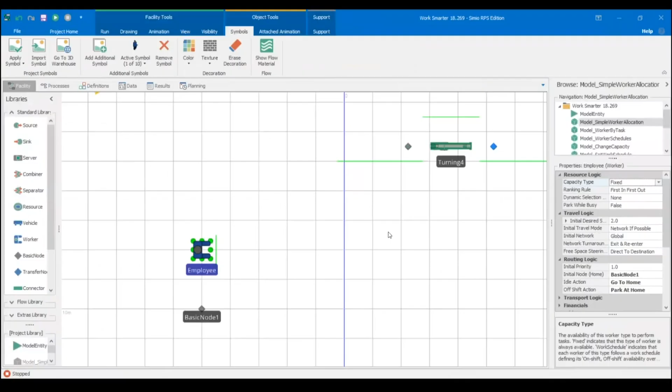We can also modify a few other properties to mimic realistic behavior, such as speed, what kind of paths it can move, and how it selects its specific task allocation. Since every single time an entity requires a worker to do something, those get added into a queue, a list of tasks the worker needs to perform. We can play around with some of the properties to sort them and figure out how the worker wants to move around and complete all of these.

But now that we have our little worker implemented in the system, we want to understand, okay, how can a worker be added to a specific machine, or the worker requirement?

If we click any of our servers or machines, you'll note that in the properties there is one specific section called secondary resources. This allows us to specify, for a given machine or station, what external resource—whether a worker object or a resource object, another object available in our library—is necessary to complete the specific tasks.

If we wanted to specify that we need an employee or worker of a certain category to come and complete the tasks, we can specify that we need a specific worker instead of a multitude of workers. In this case, all of these properties were already pre-filled as I was playing around with them before, but you would normally see a completely blank slate, ready to be filled with your options.

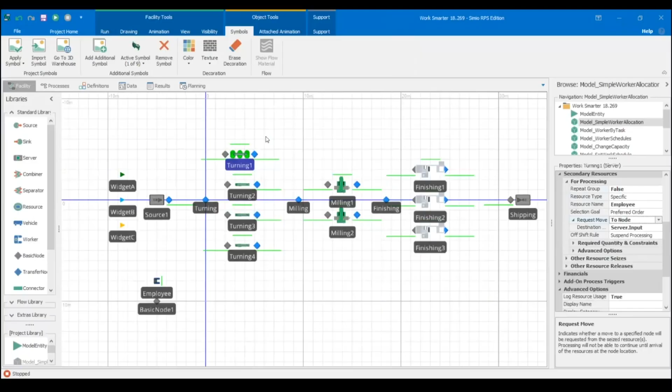In our case, this could be the node of the actual machine, so if we wanted to do something specifically here, or it could be an external node somewhere else where a task needs to be performed. For example, if there's a specific operation needed on this complex board with cables and wires, but it requires going 3 doors down to a different room with a different set of machines to fix something or complete a task there, we can specify that move right here.

In our case, I want the worker to go to the specific table, the specific machine it's working at. The generic syntax would be server.input. Because our objects are intelligent, whenever we use the generic server syntax, the machine—in this case, Turning 1—knows that the generic sentence refers to itself. So it's fully aware that I want the worker to move to the input node of the server itself, in this case Turning 1.

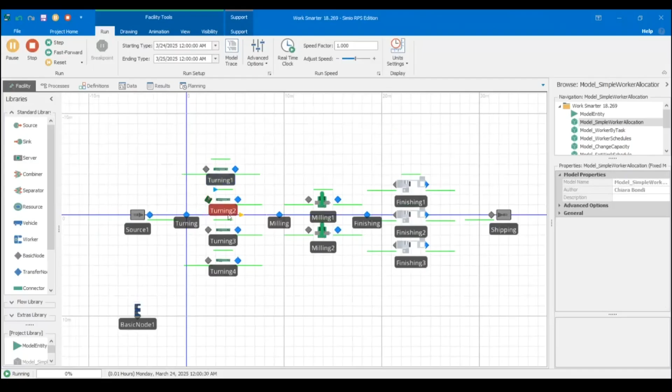Now, if we click run and watch all of our orders going, we'll see our workers start to move to wherever we've added those worker requirements. As you'll note, in some machines we've added worker requirements and in others we have not. This could depend on the type of machinery, the specifications of the task at hand, the location, etc.—for example, experimenting with old machinery that requires labor or hands-on work versus new machinery that is automated.

So this is a case where you might have different setups to figure out how to add labor to model your current system, and then how to remove that labor requirement to experiment with a new potential future setup. In this system right now, we have our workers going to complete every single task. In fact, the tasks we're performing are referencing a specific table, so we might be completing 1, 2, 3, 4, 5, 6 different operations at each given machine.

If you want to know how we added this task sequence table and how we add all those different operations, I recommend going to our building blocks part 2, because we dive much deeper into that right there.

But one of our questions might be, well, I don't actually need the worker to complete everything, because right now our worker is going to be going to each machine and complete all given tasks. So if a worker is required to complete at the turning machine tasks 1 and 2, it's going to go and be there for the entire time.

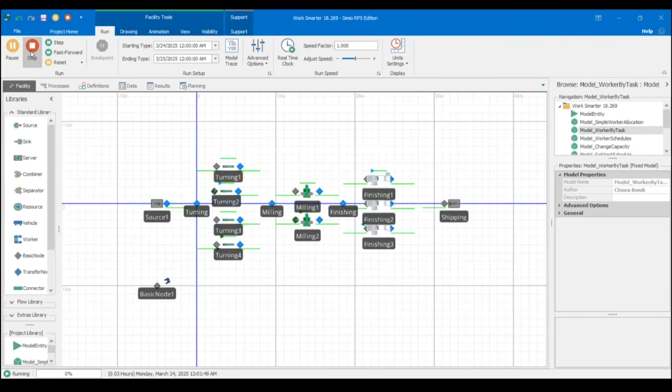So the question might be, how is that possible if we said there's no secondary resource requirement? The reason for that is because I have specified through the table what specific tasks need a worker. So it's no longer as soon as an entity arrives at a machine that the worker needs to go. The worker is going to be required only for certain operations.

And the way we can define that is if I open our repeat group property, you'll see there's a secondary resources requirement within the task repeat group. So just like we can specify one for the server itself, we can add resource requirements for the individual tasks at hand. And just like I'm referencing our table to identify the name, the branch type, the processing time, etc., I can also reference that to specify the resource type, whether it's specific or from a selection list, and then the name of that resource.

So I can now store all of that information directly inside of a table, no longer locally stored in the server. This makes it much easier for larger systems where we might have a lot of workers, a lot of machinery, each one with its own very unique worker requirements. It allows more flexibility to modify those properties, because we no longer need to go inside of each individual server, we can just access a table.

And we could even reference the location where we want that worker to move, or other requirements such as constraints and specific selection conditions. How do I ensure that the worker I pick is one that has a certain level of qualifications? We can add all of those specific needs right here and have those potentially reference a given table.

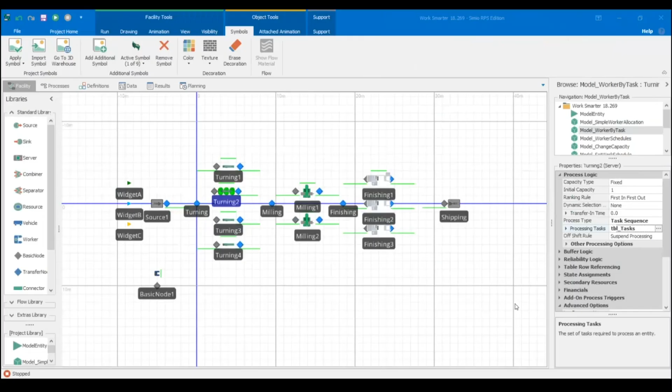So if I go into my data, you'll see the table is exactly the same as the one we saw before, just with a few extra columns. One is an enumeration property. I get confused a lot of the time trying to remember what type of column or property is needed to add the different selection options, whether it's specific, select from list, parent object, or even other enumeration types.

For example, the enumeration for material action type, whether we are trying to do a material table where we consume or produce, etc. When we want to have all those multiple options, the enumeration property is where you want to look. And then the other column that we want is our object.

In this case, I put it under transporter, but we can also just use whatever object or transporter we want to reference. We just need a table or a column so that we can specify, okay, I need an employee. Now, one key thing I want to note is when you first create a property or an object reference property, such as this one right here, you'll note that you'll get all these errors.

And all of these are because there's no object reference in the row just yet. This is because in the properties of the column, we have that each single row must have a non-null value. So every single row must reference something.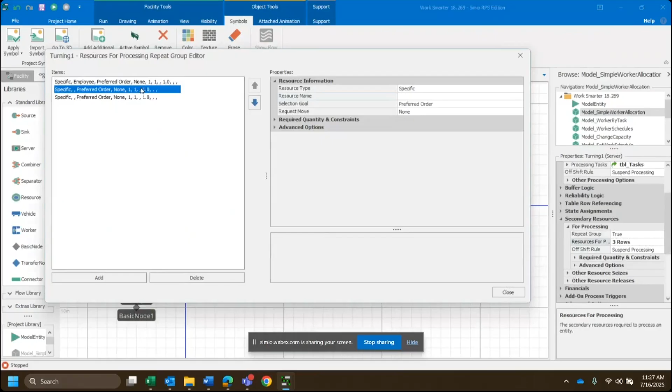So for example, say you want to model the resource of a worker and the resource of an object that they need to use, a tool, such as a drill, and you only have a certain number of tools. You can't really have the worker go and complete that operation without a drill. So those are scenarios where you might model the drill as a resource, the employee as the worker, and then specify that you actually need to have both a worker or employee as well as a resource.

In this case, this could be your drill, move to the specific node, so server input. And in those cases, whenever something goes in here, we're going to need both of these to be seized. And so now, if I click one and we just wait for one to hit, let's see if I can. Here we go. So something's gone here.

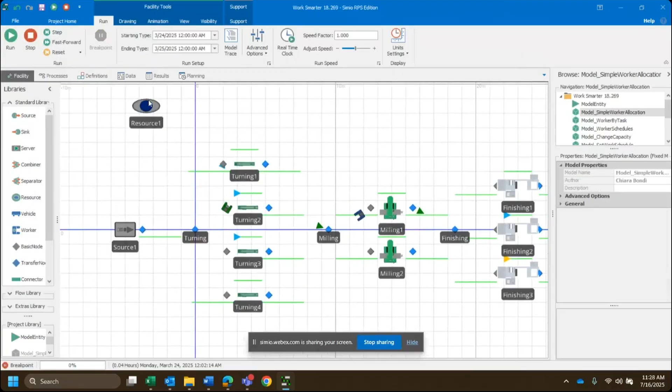And now what we should see is we'll see one worker move to the server, but we'll see the resource here also turn green. And this is because now we have seized both the worker and the resource. And now that this is finished, the resource and the worker have both been released.

All right, one more here, then I'll let you get back. How can we add a schedule that may not follow a specific pattern, but changes day by day with different breaks and times? Perfect. That's actually going to be a great transition into how do we even add work schedules in the first place.

So with that, let's jump into the next model, which is where we're going to start looking at how can I add schedules.

So right at the beginning of the presentation, when we looked at the properties of the workers very quickly, the first one that I wanted to notice was the capacity type, where it can either be a fixed capacity, always 1 or always 0, i.e. always on shift or always off shift, or we can specify a work schedule.

And you'll notice here, if I expand on these, we can start to add, okay, what is the work schedule that they need to follow? And then what are certain exceptions, like a work day where they're not actually on shift, such as a holiday, or work periods where maybe during the given day they might have to work from 9 to 12, but there's a small break in there that we need to add an exception for, and they're going to be off shift. How do we start doing that?

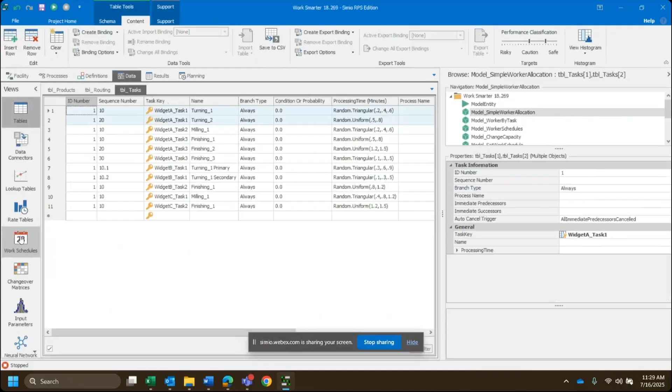Well, if we go into our data, you'll notice on the left-hand side all these different tabs, and a little bit further down there's actually work schedules. And this is where we can add both a pattern base, one that repeats every week in exactly the same manner. So what comes to mind is the standard 8 to 5 or 9 to 5 schedule where you clock in, you have a lunch break, you clock out at the end of the day.

Or if we wanted to add more flexibility, we could do so using a table. And with a table, we can have specific dates or add that information in each table where we specify for every day the specific time ranges where workers are on shift or off shift.

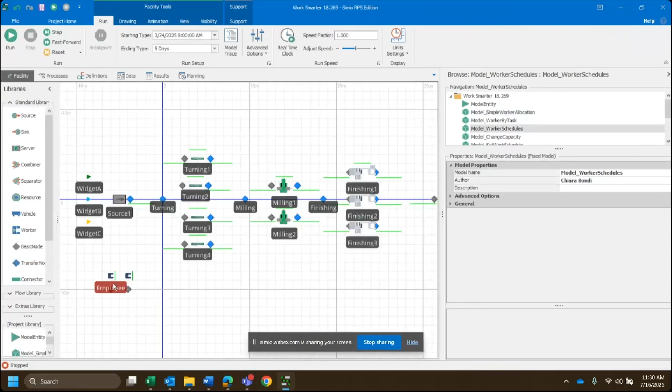But let's look at the example model that we have prepared. In our case, we're going to be looking at what happens when we have, for example, 2 different employees. One, that we want a standard schedule to be followed, a typical sort of day of work. But then we might have certain days during the week where we know we need extra help. We know that we need more hands in the system.

So let's go into that data tab and look at what that schedule looks like. You'll notice that I've created 3 different schedules. And as we go on, you'll see why.

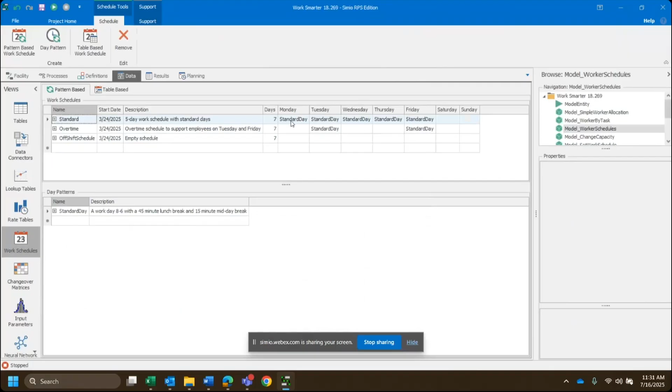The first one I want you to notice is the standard, where Monday through Friday we follow the typical standard day, which is a pattern that gets repeated. You start and finish always the same. The way we define that pattern is by adding a day pattern.

The pattern work schedule is one that gets repeated the same way every single week. Whereas if we wanted a more flexible approach, we could use a table-based work schedule, where by creating a data table, we'd define the start and end times of every on and off shift for our workers.

But in our case we're just using a standard weekly pattern, where the employees of our standard schedule work Monday through Friday from 8 a.m. till 12 p.m. They get a 45-minute break, then from 12:45 to 3:45 they work again, get a 15-minute break, and then work again from 4 to 6. That's when they end their day.

The overtime employee has that same standard day, so they'll have those same work hours, but only on Tuesdays and Fridays. Those are the workers who come in and help on the busiest days — in our case Tuesdays and Fridays, though in other cases it could be Monday, Wednesday, Friday. In certain situations that might be something you have to dynamically assign, and we're going to look at how to do that shortly.

If I look at the model and click run, you'll note the start day is the 24th of March. If we look at the calendar — actually let me stop that for a second — it's a Monday, which means if we go back to our schedule, only our employees are working on Monday and our overtime employee is not available.

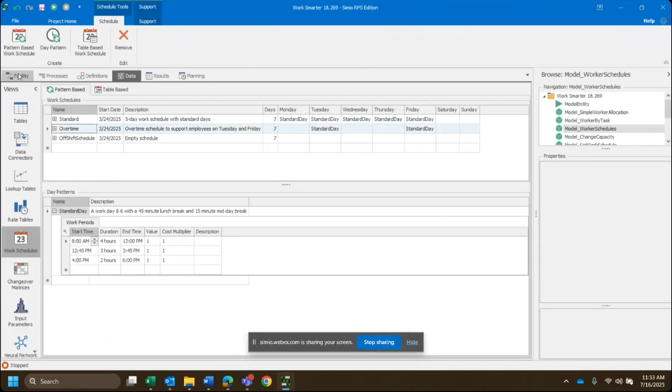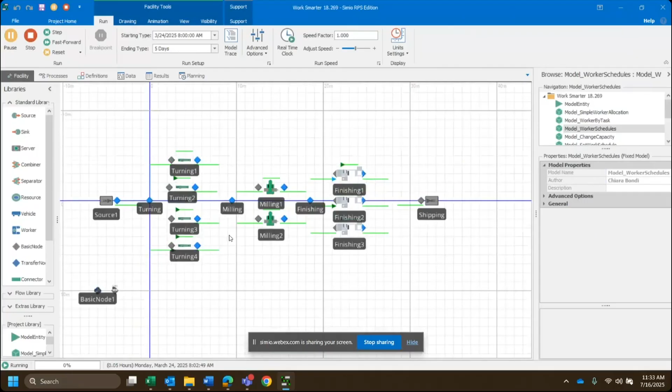They're not on shift, and in fact you'll notice we have some workers in blue, ready to work, and some in white. These are the default states Simio assigns to resources to identify when a resource is on shift but idle, off shift, or on shift and busy. Green for busy, blue for idle, white for off shift.

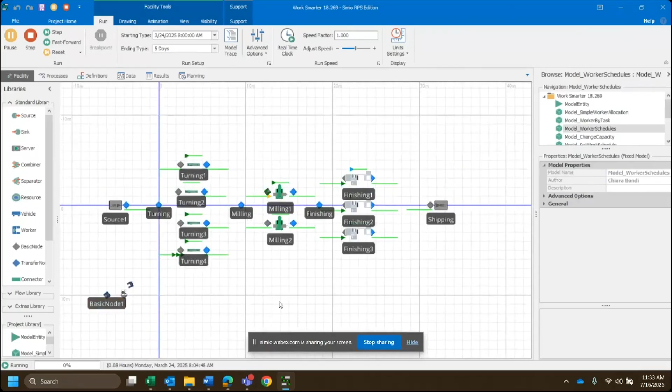So this worker will show unavailable, off shift, until the very next day, when the workers become on shift again at 8 a.m. If I fast forward to a day like Tuesday, we can see the overtime employee down here is now in blue because he is on shift and ready to work, helping however and wherever he's needed.

The way we could select either of these workers is by using a select from list. If we created a list of all our different workers — say our employee and our overtime employee — we could then have our selection, whether in a specific task or in our secondary resources, use select from list instead of specific, referencing our worker list. That way they can pick from only employees if they're on shift, or the overtime employee if they're available.

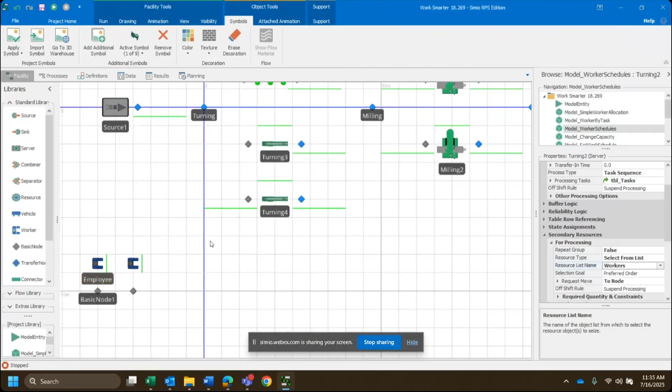Now that we've added these schedules, the question might become: what happens if I want to change things? What if I want to put a specific worker off shift, or have one of my three employees, say employee 2, go sick or take a break during the day, and I need someone else to cover that shift? How can I do that?

The first thing to note is all of this can be done. It might require a little thinking and some process logic, which is what we're going to look at. But when it comes down to it, it's a matter of first identifying the worker and then adjusting their schedule or capacity. Capacity is an actual function you can reference and adjust — it's a state, so we can say set its capacity to 0 to notify that it's off shift.

And then I can set it back to 1 where it's on shift. So let's look at an example model where that actually happens.

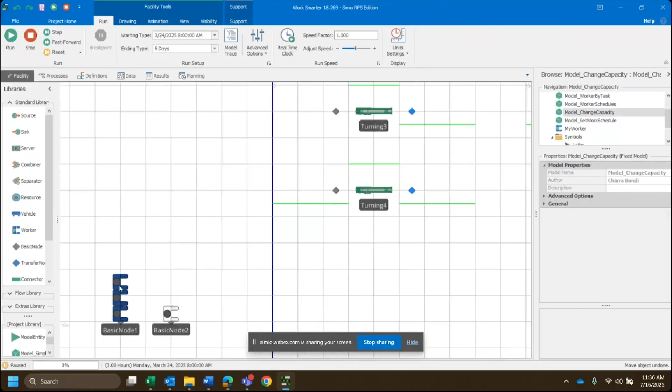In this model, I wanted to identify a specific worker from the employee population. You'll notice that every time I begin the model run, there is only 1 overtime employee but 3 standard employees. This was a property I had changed for the population property right here. This could reference a control, this could be a consistent value, this could be 1, this could be 10, whatever it is that you're trying to model in your system.

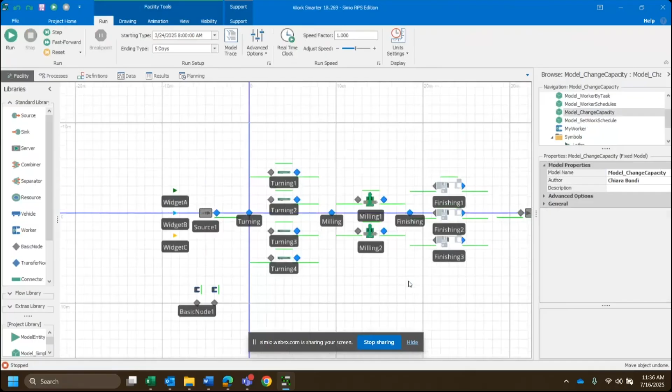But in my case, what I then want to do is identify a specific worker individually, maybe because I want to mimic what happens if worker 2 goes off shift, or I want to store the information of where worker 1, 2, and 3 have been allocated, and record that history, for example.

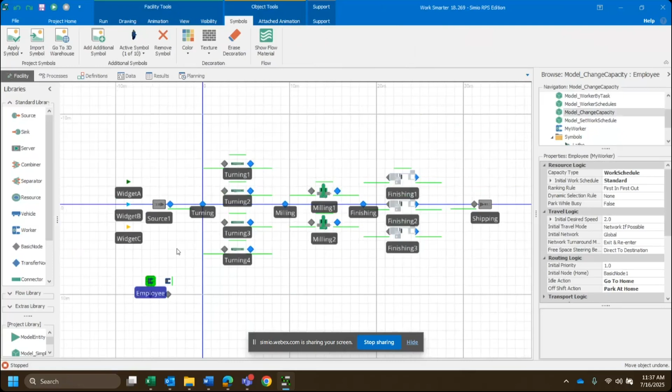Well, there's a multitude of ways to do this. You can search by utilizing the actual name of the object. You'll notice that this, for example, is called employee in square brackets 1, employee in square brackets 2, and employee square brackets 3.

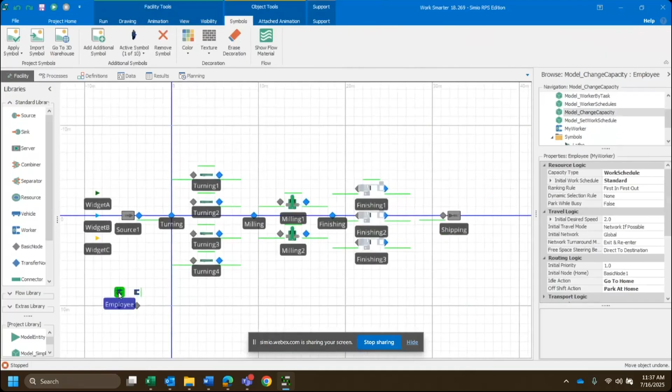But one way that I've done it is through creating a custom worker. Custom objects, we've discussed these in prior Simio Solution Series presentations. Again, all of these are recorded and saved on our website, so if you haven't taken a look at those, I really recommend it.

Very briefly, when we create custom objects, we basically want to create or modify some of the pre-existing objects and add our own personal touch, whether that's defining a new set of properties as the default, or in our case, creating a new state to help us keep track of all of the workers.

In my case, I created a custom worker where I can save the index or the ID. I might assign a specific number, 1, 2, 3, 4. You might have a specific code that you want to save, because maybe every badge of worker has a specific unique identifier that you then want to utilize.

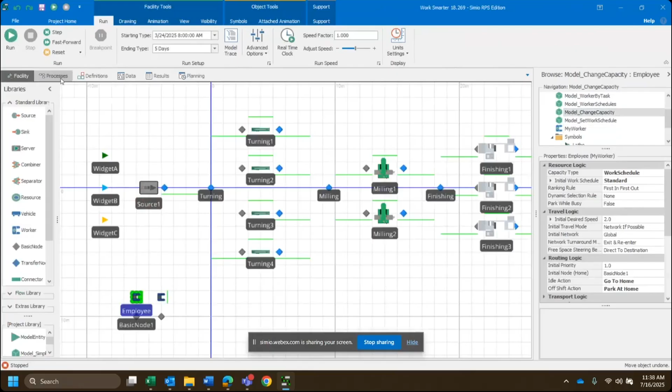That's the one I then use to assign, right at the beginning of the model run, every single worker an index. So worker 1 gets assigned index 1, worker 2 gets index 2, worker 3 gets index 3. The reason I do this is so it becomes easier to identify those specific workers. If I know worker 3 completed a certain task and I need worker 3 to come back and do that task again, I can find him through that index.

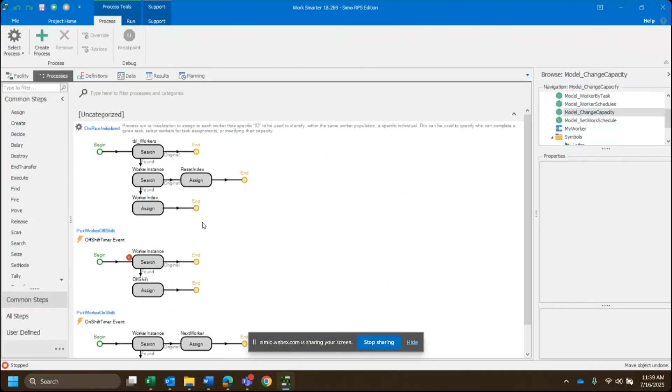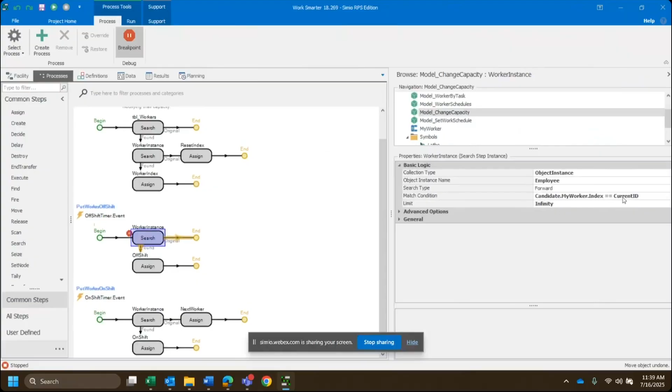The reason I want to do that is because we might use the processes to figure out, okay, I need to find the current worker. Say I want to find a worker of ID 2, or the second worker in my population, and I want to put them off shift. I want that worker to go and have a break, for example.

Through process logic, if I fast forward, I have this specific process where I look for that specific instance of worker, and then through the assign, you'll notice my current capacity is one of the properties. It's a property that is of the worker itself as well, not just of the standard worker or of the custom object worker, but of the worker object itself. You'll notice that if I remove the my worker, there's no error.

In my case, because they are custom workers, I want to specify that. But the current capacity is the one we can then modify to specify the worker goes on shift or off shift. So now, if we find worker 2, where is he? Is this one it? That's employee 3.

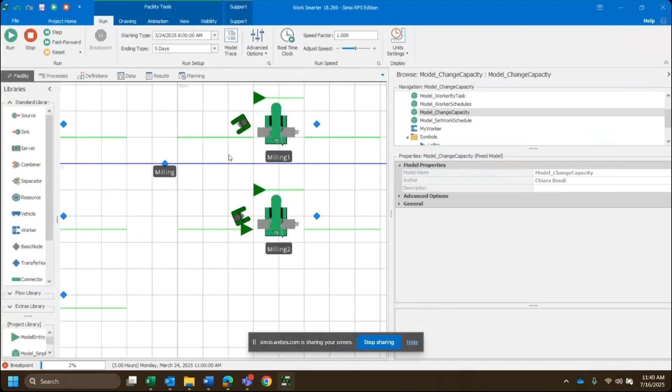This is employee 2. Right now employee 2 is working, busy at the milling station doing something. But he might have gotten a call and needs to go pick it up, or he might have become busy and needs to run away for a certain amount of time.

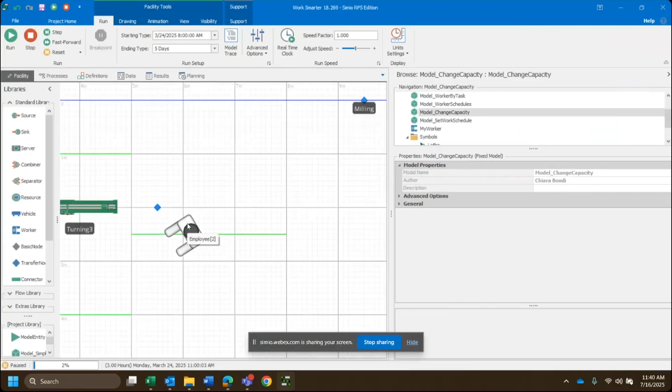Through that process, by assigning his capacity to 0, you'll notice he went from green, i.e. busy, to white, i.e. off shift. So now this worker is going off shift, and they'll stay off shift until I change their capacity back, or there's a change in the schedule that sets capacity back to 1.

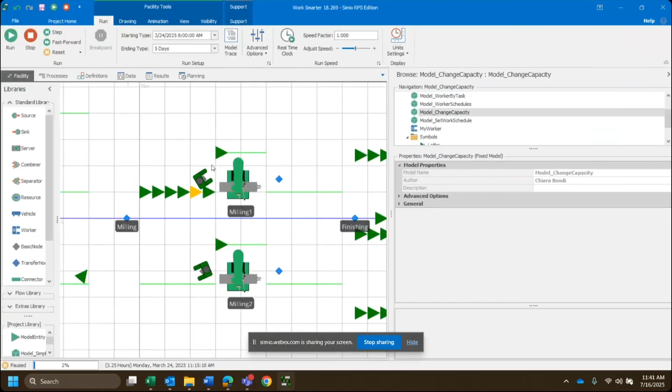In my case, through process logic, if I hit this again, I decided they were only going to be out for 15 minutes. Maybe this is a bathroom break we want to model. They were out for 15 minutes and now go back to continue the operation they had left, right where they started.

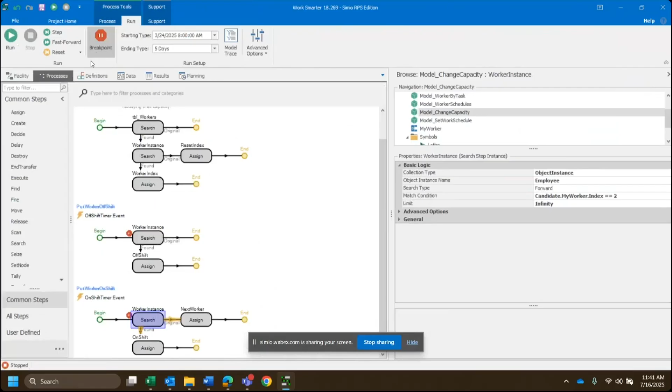Through a similar system we can search for other populations, such as the overtime employee, to go back on shift or go on shift and then off shift when they come back. So through process logic, using these search steps, I can do another search step where I search for an object instance of type overtime employee.

Then I can assign, just by copying the step, the current capacity to 1. If I fast forward, we should see this worker turn white and this one now become busy. And we saw it do exactly that.

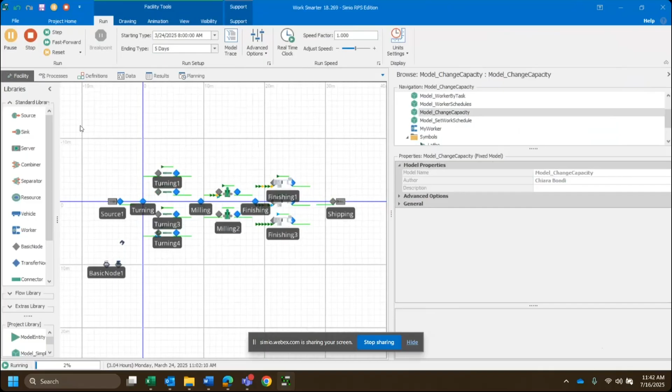However, one thing I mentioned was that the only way to change its capacity back to 1, or return its shift, is if we readjust their capacity. But instead of adjusting capacity, through process logic we can utilize a set work schedule step where we can assign specific schedules and change them during the model run.

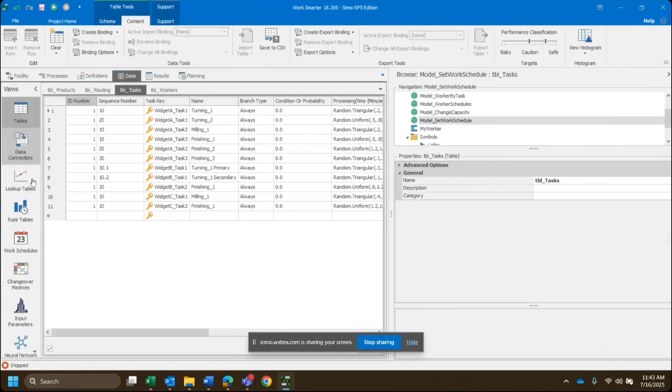So in my next and final model of the session, same exact setup: I have my workers, my overtime employee, all with those different schedules. I've also created an off shift schedule, where I might want to put a worker completely off shift for the remainder of the day, and then modify or adjust other worker schedules, maybe moving them from support to standard, standard to support, standard to off schedule to support, etc.

But the idea is exactly the same. We can do this by searching for the specific worker, in my case worker 2, and I decide I need that worker to go completely off shift. So put them on the off shift schedule.

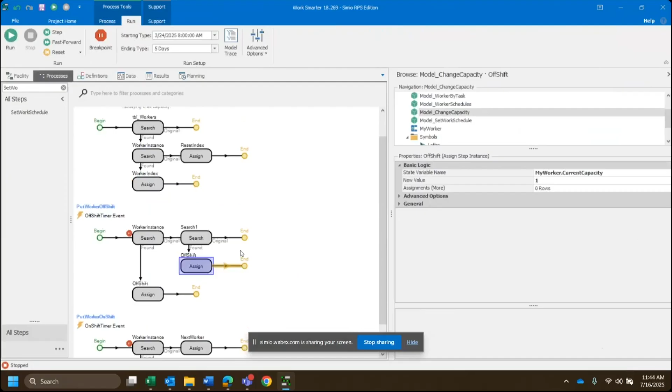And maybe I want the overtime employee to now follow the standard schedule. The difference between changing the capacity and the schedule is that the worker will still follow the same break patterns as everyone else. Otherwise, in the previous setup, when all the other workers go on break, that overtime employee might still be working at 10 p.m. when everyone's away, because we've only assigned the capacity to 1, unless we've modified it back to 0.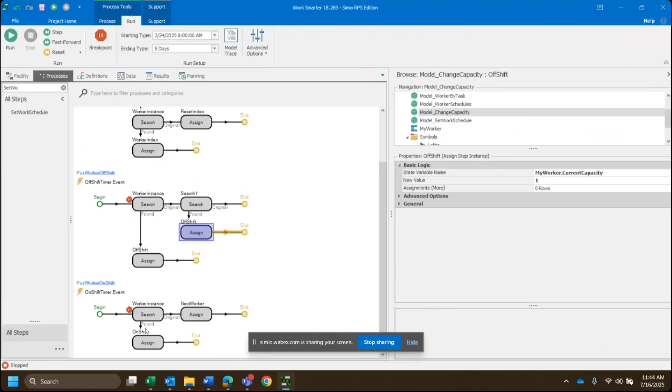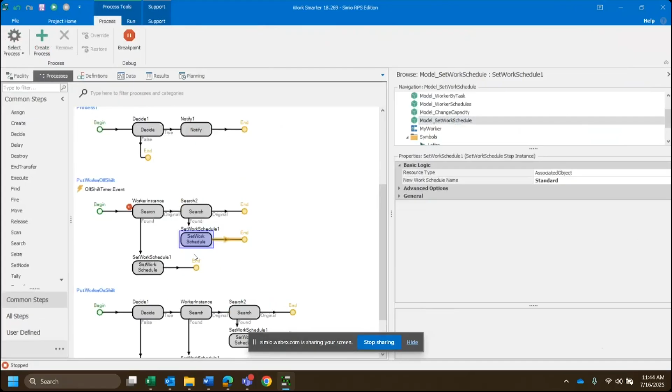But if we actually set schedules, they'll be able to follow along on those given breaks - going on break, on shift, off shift, following that very specific pattern. So now we can see our worker going off shift, the support worker is now on shift, and as we continue our model run you'll see him continuing on, now following the actual standard schedule.

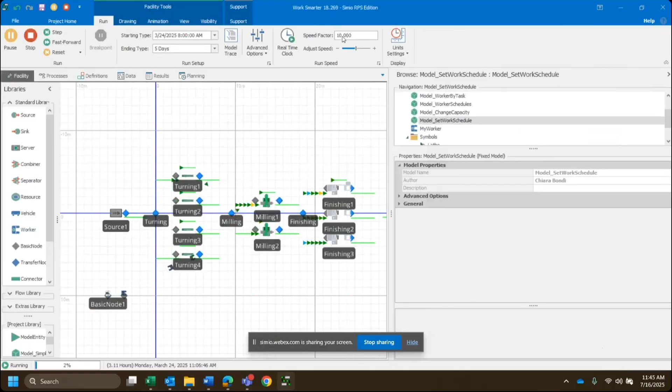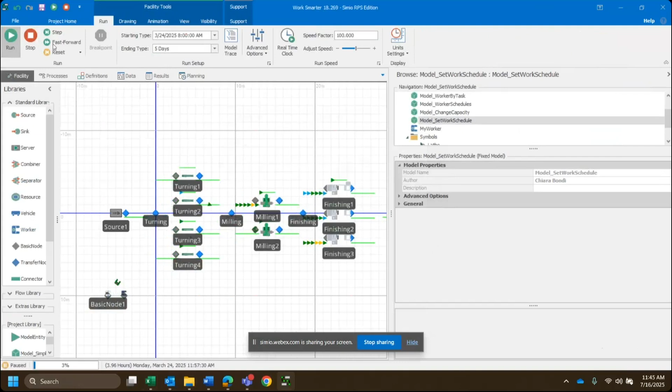So as soon as they go off shift, say at 12, let's speed this up a bit - might have to speed it up more. Just give it a second, because at 12 they should all go on break. Excellent, let me pause and bring this back down to 1. So now we'll see all of them are on break, because they're following the same pattern we wanted.

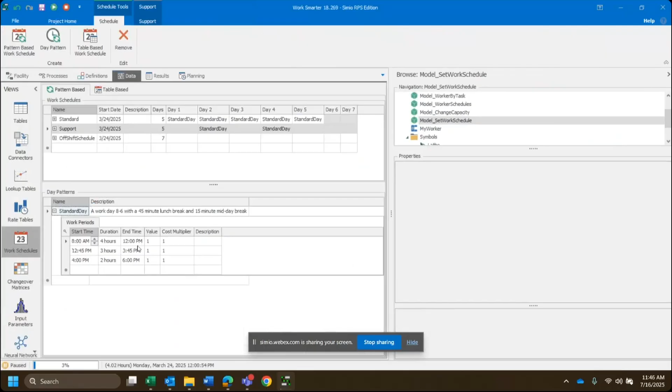That pattern being: you work until 12, and then from 12 to 12:45 you are on break. So these are a few ways we can start adding these worker requirements and nuances - what is my work schedule like, what if I need to modify something on the fly, how can I find those specific worker instances and modify their schedule, their capacity, adjust what they're doing, etc.

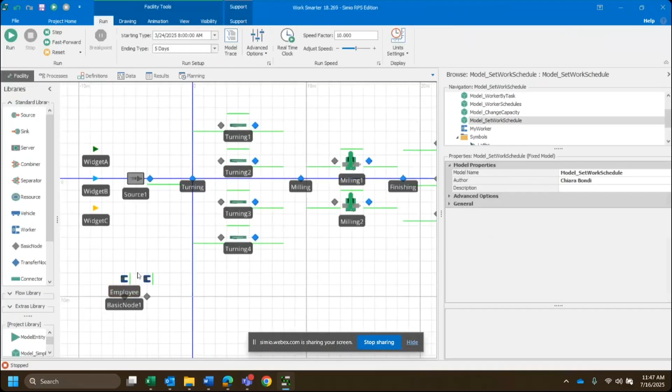Absolutely, that's a great question, and that's definitely something that needs to be considered whenever we are modeling specific tasks. Because if there's an intern doing a specific task, they might take a little bit longer than someone who's been there for 10 years and has done this on repeat over and over again. The way we can do this is it's not necessarily something we can modify on the worker instance itself, because we might want, for example, say we have 3 workers of category employee, but each one might have a different experience or different skill set. What we can do is, similar to how I've created an index, we can use another property, maybe this index, instead of being indexed, it could be experience. So experience 1, 2, or 3. And then in the actual servers and in the tasks, you'll notice under resource requirements.

Under required quantity constraints, there is resource efficiency. This is the value you want to play around with to model workers that are more or less efficient, and you can actually reference the worker that you're seizing. So you might specify, okay, I need, for the selection condition, a worker with a minimum of 3 years of experience. That could be a selection condition where you search for your workers and say that worker.index, that worker.id, that worker.experience, whatever that property is, must be above a certain value. And then use that as well to reference here in the resource efficiency.

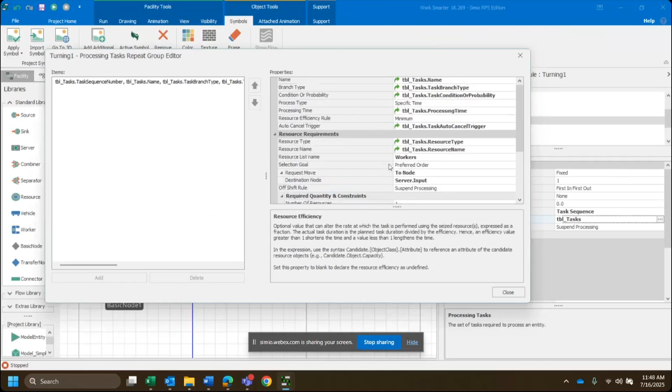What this does is it modifies the rate at which a specific task is performed. The default is 1, so if the task is supposed to be 5 minutes, with a resource efficiency of 1, the worker will complete the task in 5 minutes. But as we modify this, if we want the duration to be longer or shorter, we want the efficiency to be larger or smaller. An efficiency value greater than 1 shortens the time, and a value less than 1 lengthens it. So say we have a worker whose experience is 2, they'll complete that task instead of in 5 minutes, in 2.5 minutes. Whereas if the resource efficiency is 0.5, it's going to take them twice as long instead of half the time.

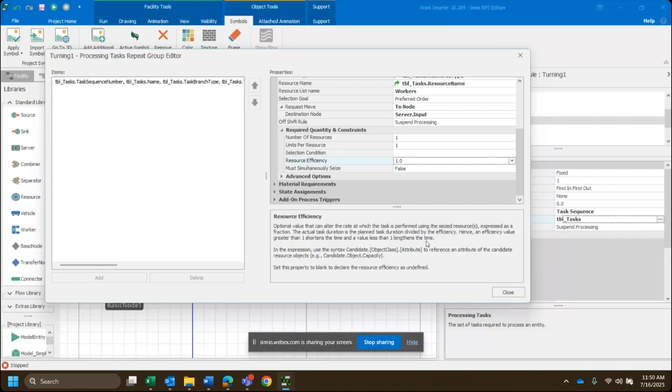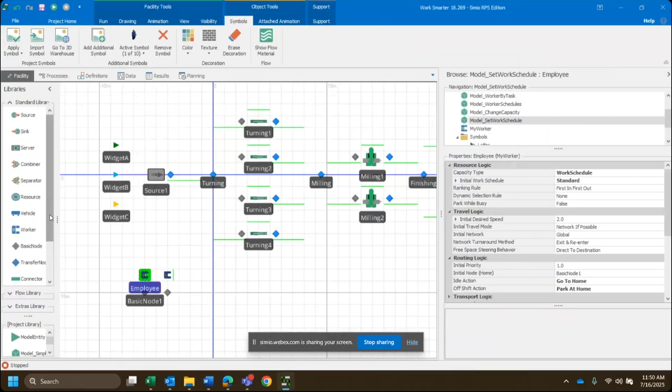Can workers be used to move entities between stations, or can only vehicles do so? The worker can absolutely move it. In fact, the worker in and of itself is also considered a transporter, just like the vehicle object.

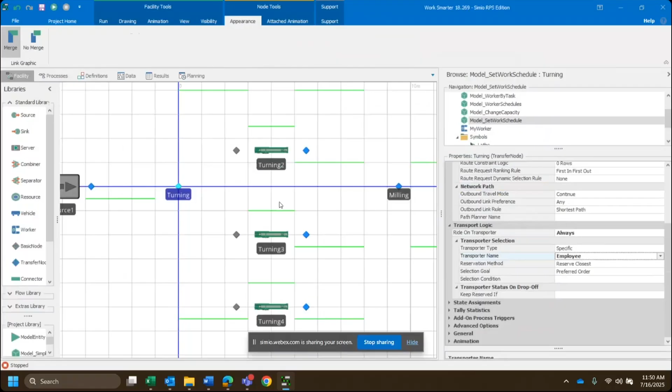The way we would add that is at the specific output nodes, so the little blue nodes, output or transfer nodes, we can specify the routing out, sort of in the routing logic, or in the process properties, transport logic, where if we set this as true, or always, or conditional - i.e. we always need a transporter, or we might need it based on a certain condition, whatever that may be - we can specify the transporter be an employee, or a worker, or a vehicle, etc. So just like workers can be seized to complete tasks at hand, they can also be the ones in charge of moving objects around.

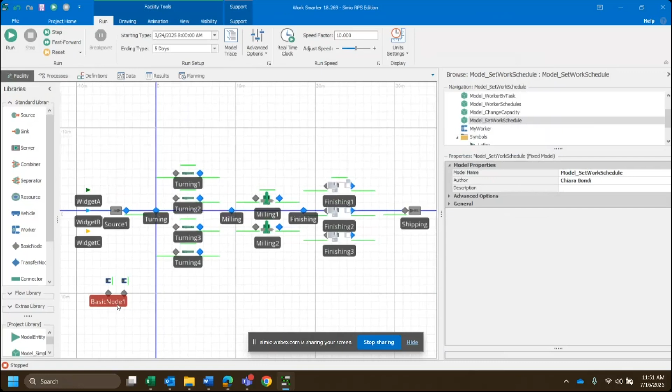All right, will changing a worker's current capacity have an impact on the worker's utilization rate? So the utilization rate will take into consideration how long it's idle when it's on shift. So putting that worker off shift will... I guess the question is, or what I'd want to understand is what the person asking this means by impacting it. Because if they go off shift, then they're technically not supposed to be working, so it's not going to decrease their utilization rate, if that's the kind of question they're trying to ask.

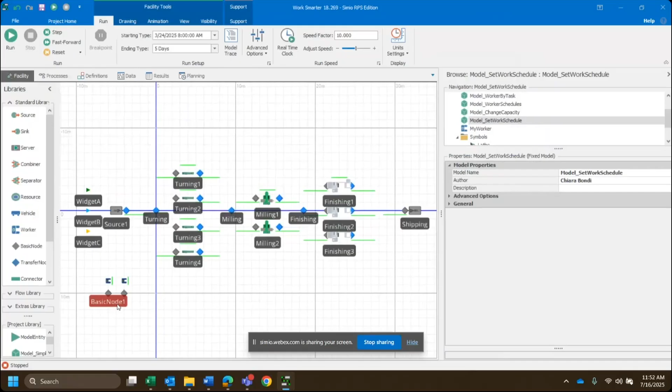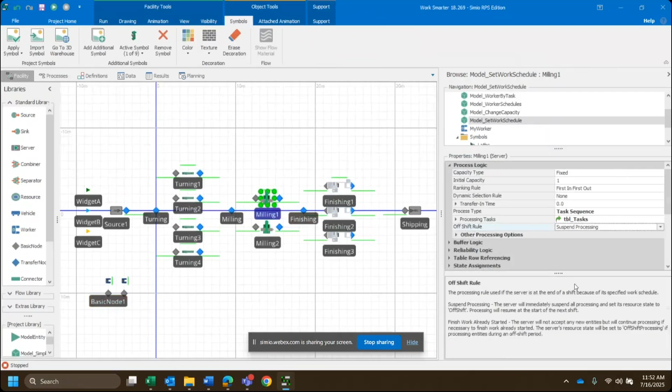What happens to the task at hand if the worker goes off shift? Does the task restart its processing once the worker returns on shift? Can we change worker if one goes off shift? I think we answered some of those throughout the session, but there might be a little repeat, let's see.

So the way we specify the behavior of the task at hand is fully dependent on the machine itself. There's an off shift rule that allows us to specify what we want to do if our resource goes off shift. There are a couple options. The first is suspend processing, meaning the worker goes away and the processing is put on hold. So if it was supposed to process for 5 minutes but only completed 3, when the worker returns it will only process for the remaining 2 minutes, not the entire original 5.

The other option is finish work already started. Going back to the previous question, this will actually impact utilization rates because the worker is going to be busy but technically off shift. That's why sometimes we see utilization rates above 100%, because they're actually getting used when they're not supposed to be, since they're technically off shift but might still be working.

Going back to the last question, this is how you would modify what happens when a worker goes off shift and decides to leave the machine. That operation doesn't restart from the beginning, it'll just pick up where it left off.

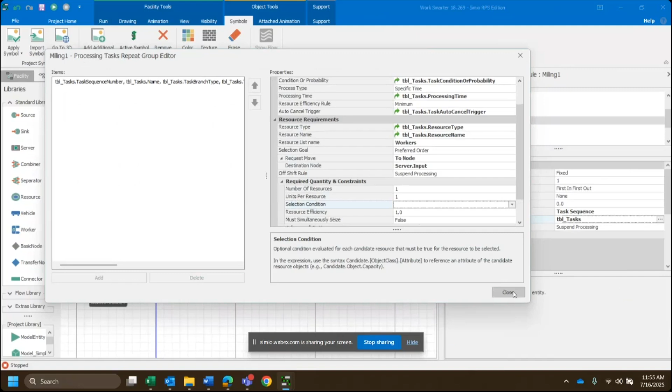This becomes really important in a lot of manual, hands-on operations where you need someone with more experience or more qualifications to do that, because not everyone might have the same skill set to complete certain tasks. So it's in the selection condition where we can add those requirements and specifications to ensure we only select the workers that we want.